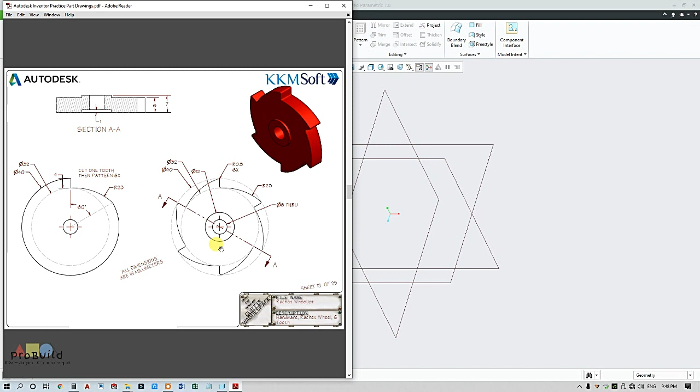Here you can find some of its orthographic views. Here is the main data furnished in this document, and I will select this as my front plane. Here I need to go up with this smaller circle. You can see this hidden line, actually we call it a construction line, and its diameter is given as 32, and the outer construction line is 40. So I'm going to take this front view and go for extrude.

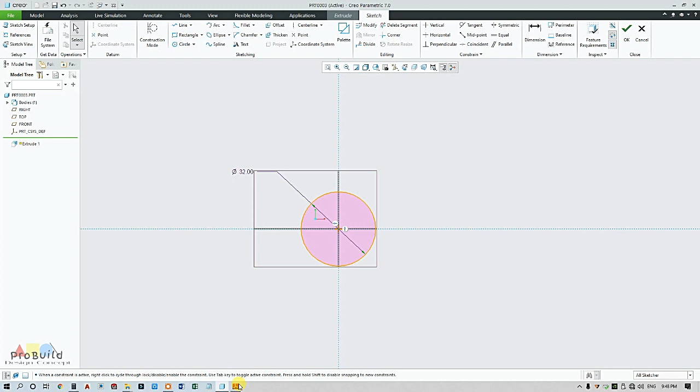Draw circle diameter, and it is extruded up to 6. So what I'm going to do is go for symmetry, mark 6, and extrude. Now I'm going to draw this teeth, and they have given some references.

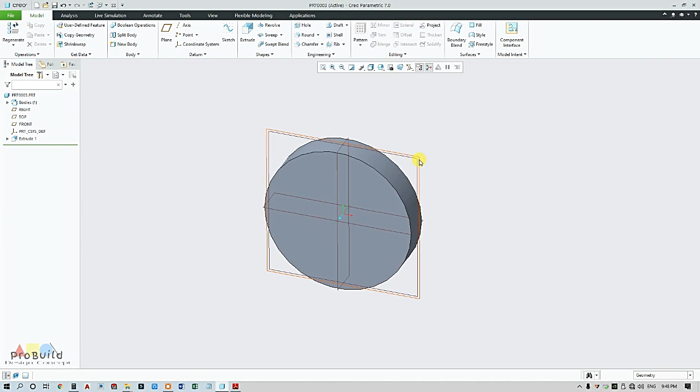So let me choose this center, this front plane, and go for extrude once again. Now I'm going to take this reference, switch off the plane, and change to hidden line.

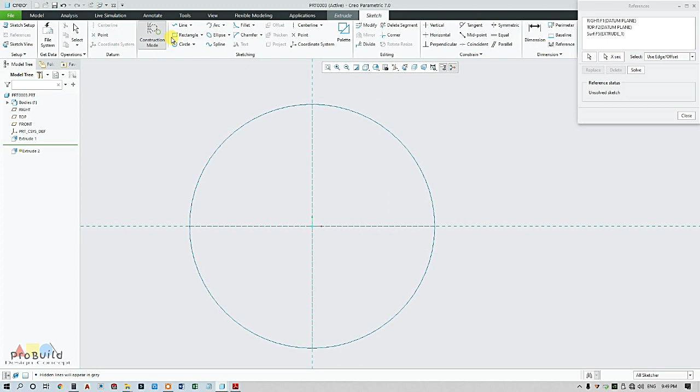Now I'm going to draw this construction line. This construction line is dia 40. So this is my construction circle, which is 40, meaning 20 in radius, and you can find here they have given this line as 4, and another center line offsetted at a 60-degree angle.

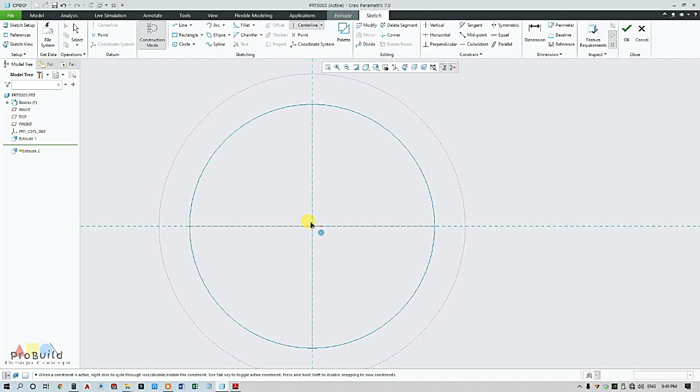So just plot one center line and go for 60-degree angle, and switch off this construction mode, go to line, draw one line here and connect these two circles with this line. Go for arc. Here you can see this is an arc.

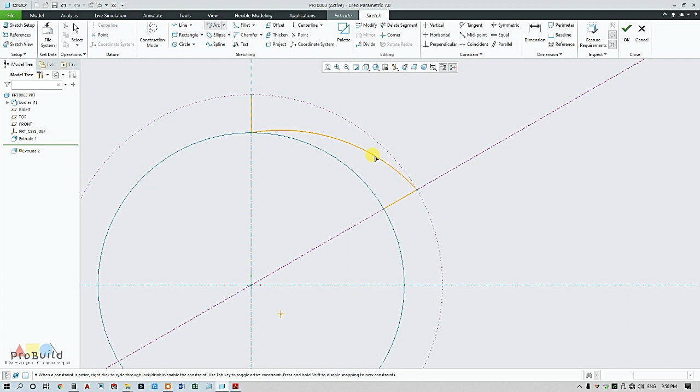It is connected with R23. So what I'm going to do is go for a 3-point arc, select this point, plot here approximately, and change this to 23. Now I'm going to project this circle and go for delete segment, delete this part, and remove this part. So my one tooth is ready.

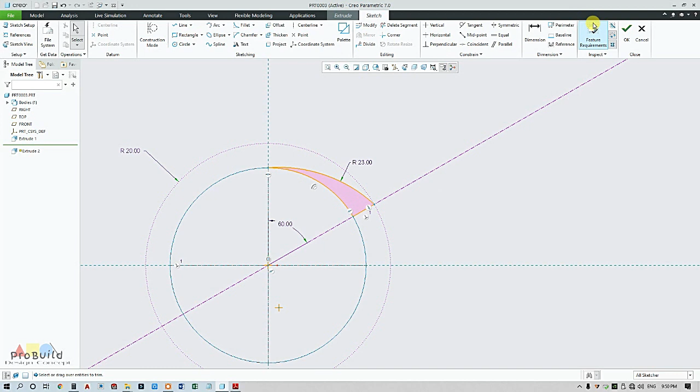So here you can cut one tooth, then pattern it 6 times. I'm going to make this symmetry once again, go for 6, and click OK.

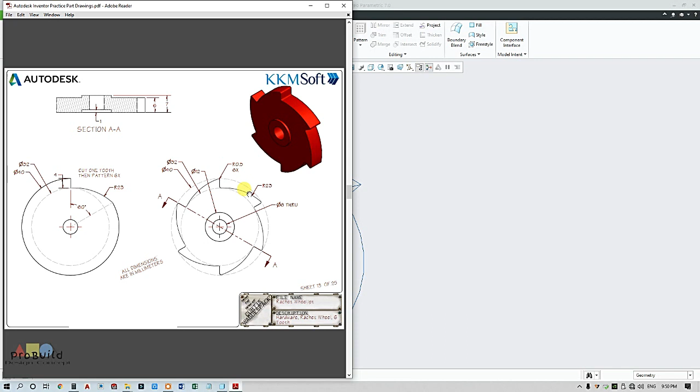Now I need to make a round. For that, you can see here all dimensions are in millimeters. Something, where is the fillet? It's R 0.5 into 6. Okay, so go for round. It's already at 0.5, so no problem.

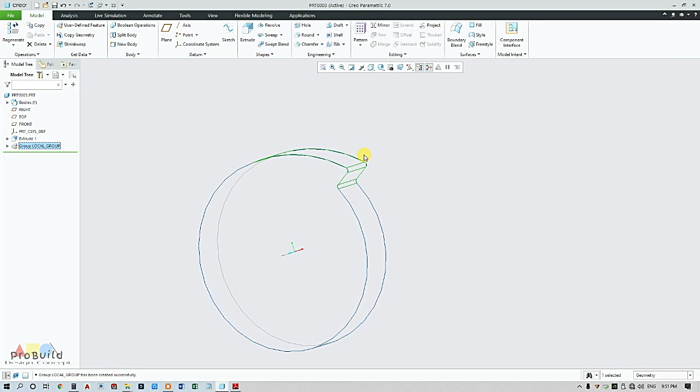Okay, so I've done 2 operations. I'm going to make these 2 operations an axis pattern. So select this round, extrude, right click, and select this group so that it becomes a single operation. If I select this group, my fillet as well as that extruded tooth will get selected and highlighted, then go for pattern, axis pattern, and select this axis. My number of members is 6, and click this 360 degree, and click OK.

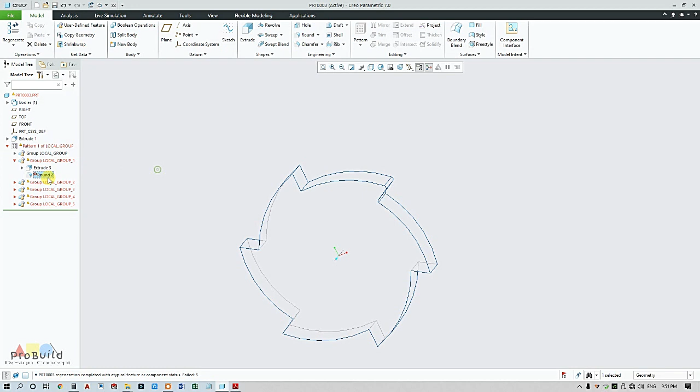Now it's all done, go for regeneration. So here I can find 5 things aren't regenerated, it's all round. Actually the round is not getting patterned, so I'm going to delete this.

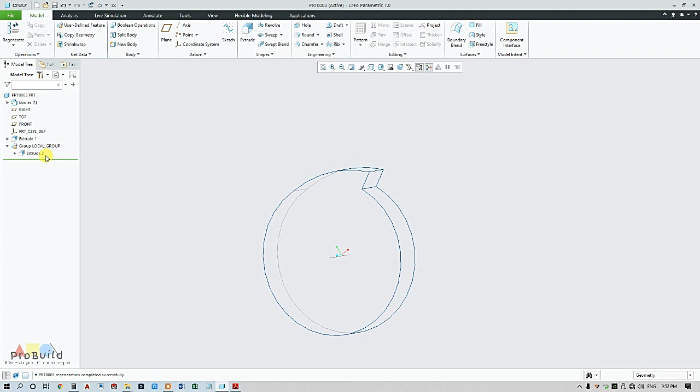Now I'm going to pattern this along. Go for extrude, pattern, axis pattern, select axis, go for 6, and change this to 360 degree.

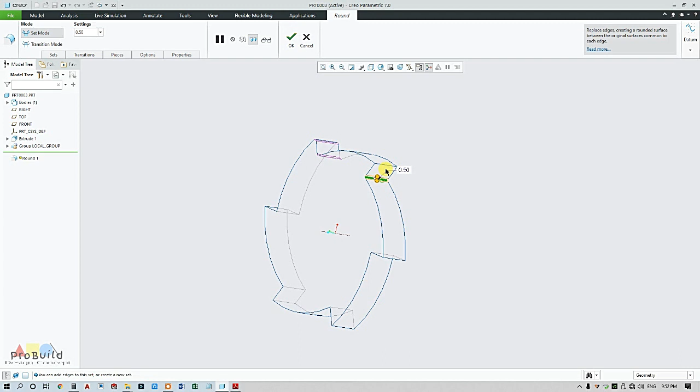Now I'm going for round separately. I'm going to make everything blunt. Okay, then click OK. So it's all ready.

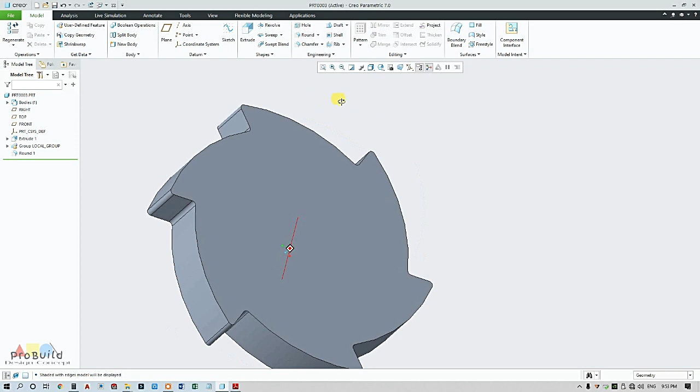Now change this view, so you can find the outer sketch is almost over. Now we can go for the remaining part, and here you can find one extrude, and the circle is of dia 12 and it is extruded for 1 mm.

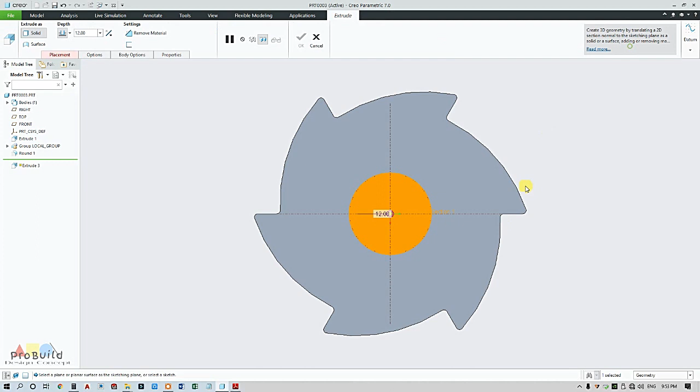So opposite to this extrusion you can find one counterbore, and its data is given here. Yeah, this is of the same counterbore size. This is 12 and this is 6 through.

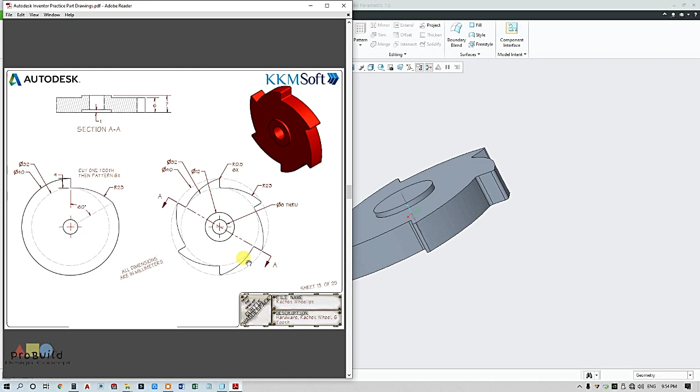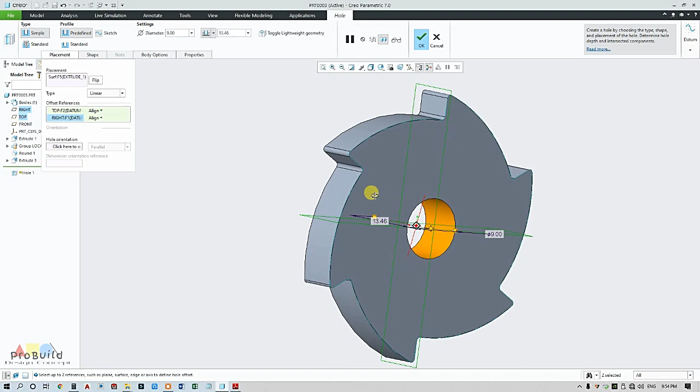So I'm going to go ahead and select the surface, go for a hole, switch on the plane. Now in placement, place this to one flip here and one flip here. Go for offset, go for align so that it becomes concentric. Make sure this is concentric, and then go to standard.

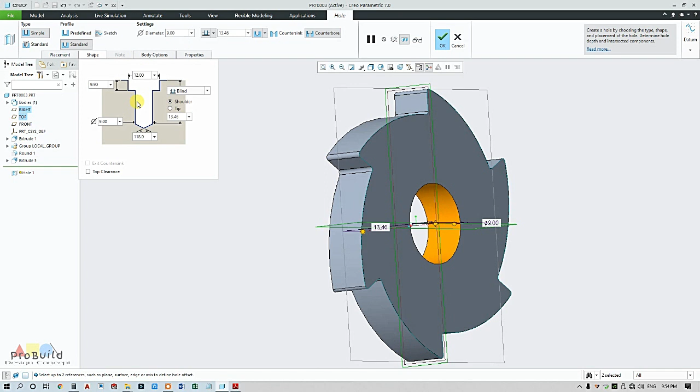Change this to counterbore. In shape, my major dia is going to be 12, my minor dia is going to be 6, minor is going to be 6, and this is going to be 1, and then up to this surface, and click OK. Yeah, it's all done.

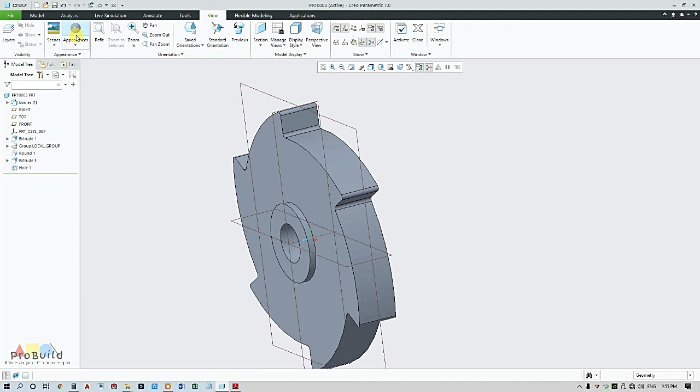So this is the final part. What I'm going to do is go for view, appearances, change color, double click. That's it, so my part is ready.

So this is what they have given here. So this is the part. It's very easy, so please try this in PTC Creo 7.0 for a better experience.